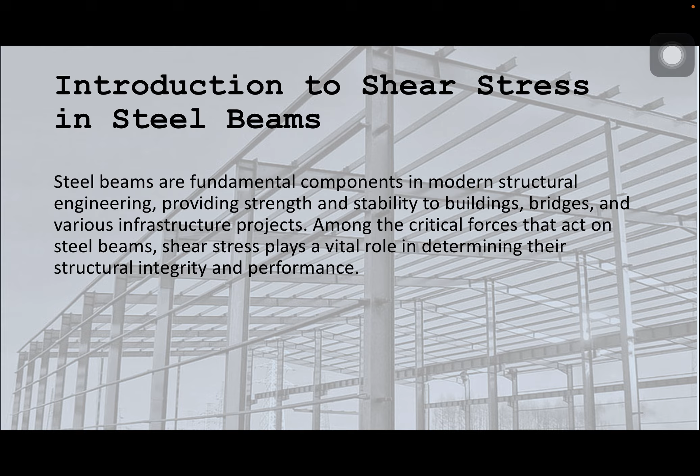Shear stress refers to the internal force per unit area that acts parallel to the cross-section of material. So in steel beams, it arises primarily from transverse loads, which are forces applied perpendicular to the longitudinal axis of the beam. These loads generate reactions and internal stresses that the beam must resist to maintain equilibrium and to prevent failure. So understanding the distribution and magnitude of shear stress is essential for ensuring the safety and efficiency of structural designs.

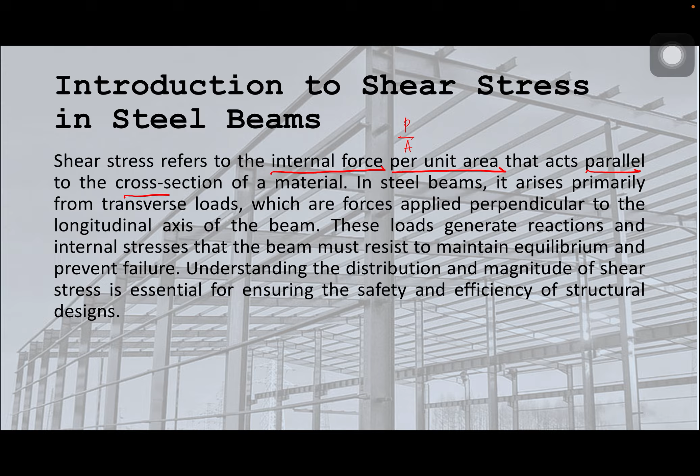So traditionally, shear stress in steel beams is analyzed using the principles of mechanics of materials, including the application of the shear formula. And this is the shear formula wherein shear stress is equal to VQ over IB, wherein fv is equal to the shear stress at a given point in the cross section, V is the shear force acting on the beam, Q is the first moment of the area above or below the point of interest about the neutral axis. And this is also called the static moment.

And how do we solve for Q? Q is solvable by using the equation Q is equal to summation of AY. And take note that that is just the first moment of area above, or below the point of interest. And then yung I natin, that is the moment of inertia of the entire cross section. When we say entire, ibig sabihin pang kabuuan. So, may pinagkaiba kasi sila pagdating kay Q because the static moment naman is meron lang tayong kinukuha.

Then the B is the width of the cross section at the point of interest or yan yung thickness or kung ano man yung kung saan tayo dadaan pagdating sa shear natin. The equation above is based on the assumption that the stress is constant across the width B and it is therefore accurate only for small values of B.

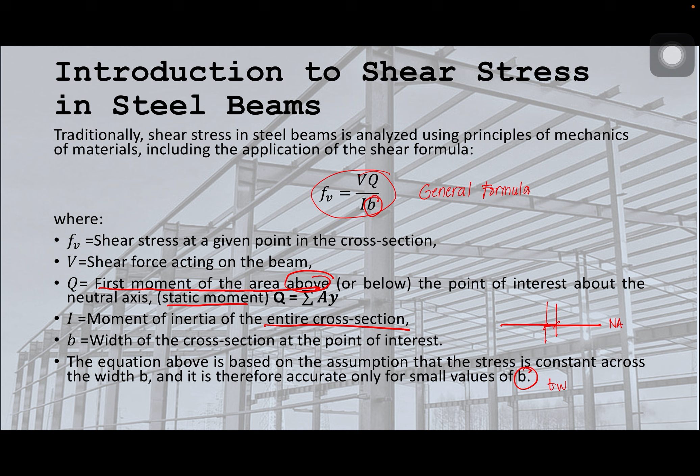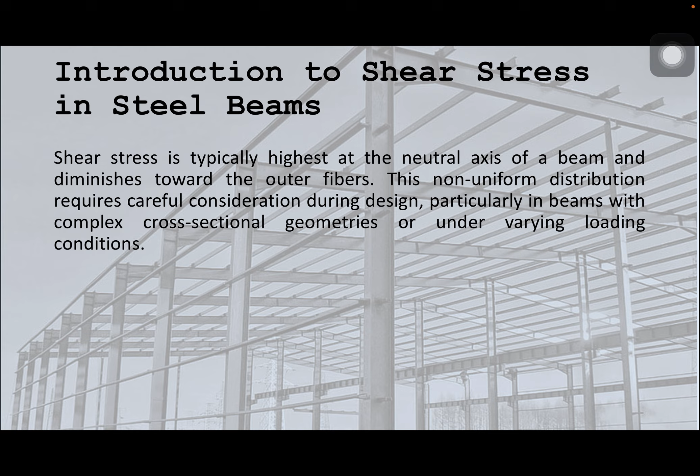So shear stress is typically highest at the neutral axis of the beam and diminishes toward the outer fibers. This non-uniform distribution requires careful consideration during design, particularly in beams with complex cross-sectional geometries or under varying loading conditions. So in practice, structural engineers must account for shear stress to prevent potential modes of failure, such as shear yielding or shear buckling. So steel beams are often reinforced with web stiffeners or designed with optimized geometries to enhance their shear resistance.

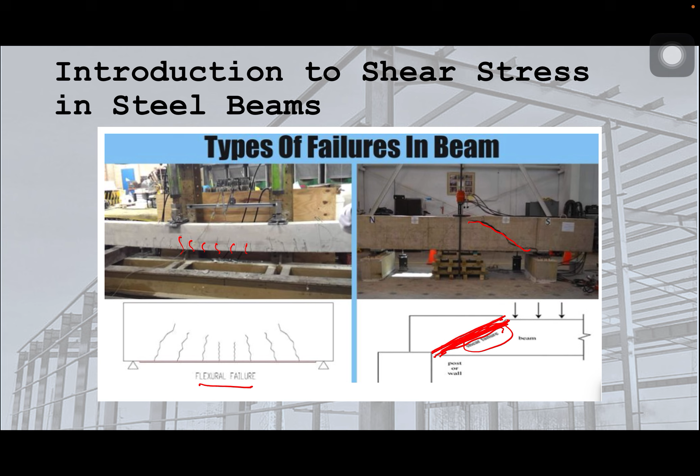So this is the distribution of the I-beam. Okay, so 'di ba sabi nga sa atin kanina that the maximum shear stress is occurring at the neutral axis of the section because when we distribute the shear strength ng ating beam natin, makikita natin that this one, ang laki niya dito. Eh, saan ba yan nanggaling? Ito po, dito sa ating web. Pero pagdating doon sa may flange natin, ito lang siya. So, stiff lang kasi siya.

So, kasi kumbaga, di ba, ang pinaka-critical talaga pagdating sa I-beam natin is the web. Pag naglagay ka kasi ng load dyan, sino ba yung unang masisira? Siyempre, ang nasisira ay yung ating web. So, kaya siya nagkakaroon ng buckle. So, that's why this is what we call the shearing formula natin. So, fv is equal to VQ over IT or this is just IB as well. So, yung T kasi dyan is just the thickness as well.

And then, to get now the average naman. Kasi kung titignan natin, di ba, yung itsura naman din niya talaga is para lang din natin siyang mako-consider as parang assumption natin na ang nangyari sa kanya is a rectangular shape. So if we're going to get the average shear stress, it is this one. We use FV is equal to V over AW, wherein yung AW natin is just the depth multiplied by the thickness of the web.

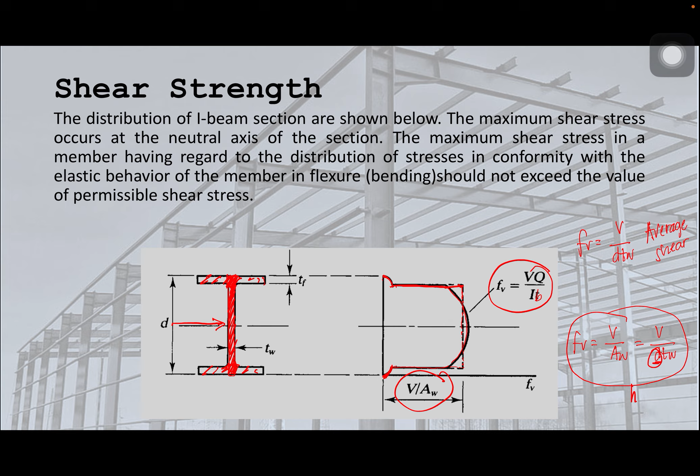So clearly, the web will completely yield before the flanges begin to yield. Because of this, yielding of the web represents one of the shear limit states, taking the shear yield stress as 60% of the tensile yield stress, we can write the equation for the stress in the web at failure as, so sabi nga natin, shear stress is equal to force over the area, wherein yung area na pinag-uusapan natin dito is area of the web, and yung force natin is the shear force. So we have V over dTW.

And sabi nga natin, taking the shear yield stress as 60% of the tensile yield stress, we're going to equate this as 0.6 of our Fy. So therefore, kuhanin natin ito, yung part na yan. So we have V over dTW is equal to 0.6 Fy. And if we're going to talk about the shear force only, lipat lang natin si dTW sa kanan, magkakaroon na tayo ng V is equal to 0.6 Fy dTW.

But on the other hand, the nominal strength corresponding to this limit state will be nominal strength in shear provided that there is no shear buckling of the web. Whether that occurs will depend on H over TW, wherein yung H natin dito is just the height lang ng web natin talaga. The width thickness ratio of the web. So if this ratio is too large, that is, if the web is too slender, the web can buckle in shear either elastically or inelastically.

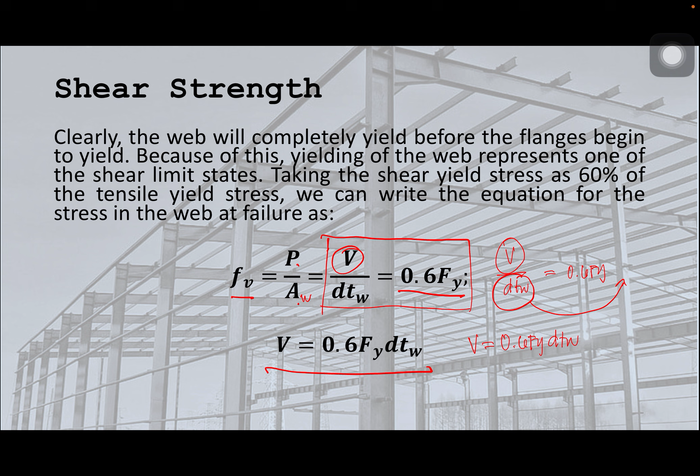This one, okay? So, kumbaga, nilagay natin that the value of the shear is 0.6 Fy dtw. And then, you're going to divide it by dtw. So, kung makikita natin, magka-cancel na siya. So, ang natira na lang sa atin dito is 0.6 Fy over 1.5. So 0.6 over 1.5, we're going to get 0.4 and then we multiply it by Fy. So therefore, if this is the case, then your Fv will be equal to 0.4 Fy.

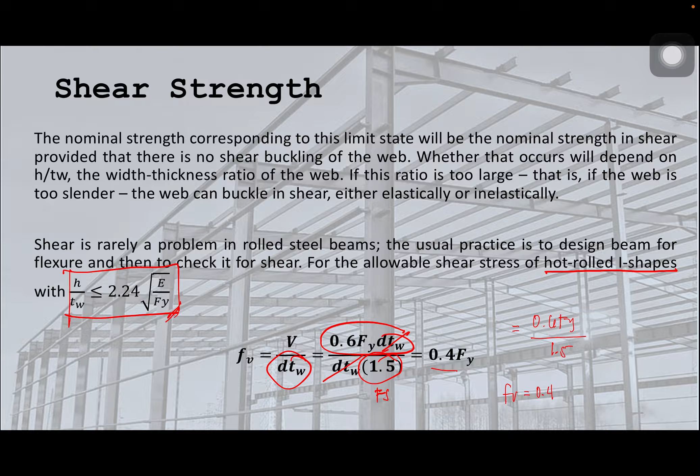So aside from the shear strength, we're going to talk also about the shear flow. Shear flow frequently occurs when dealing with built-up beams. So these are beams fabricated with several pieces joined by glue, nails, bolts, or welds. So these fasteners must be sufficiently strong to withstand the longitudinal shear. So syempre, pag nagkakaroon tayo ng built-up section, pinagpapatong-patong natin or pinagsasama-sama natin sila. So therefore, dapat masigurado pa rin natin yung flow ng shearing niya.

Okay? So, in this case, ang magiging formula natin is just q is equal to VQ over I, wherein yung q na maliit natin is the shear flow. So this is the shear flow and same process. V is the shear force and then Q is the static moment. And then yung I natin is the moment of inertia. So kung papansinin natin, ang nawala lang is yung thickness kasi 'di ba yung Fv is equal to VQ over Ib natin. So tinanggal lang natin si b, makukuha na natin yung formula ng shear flow.

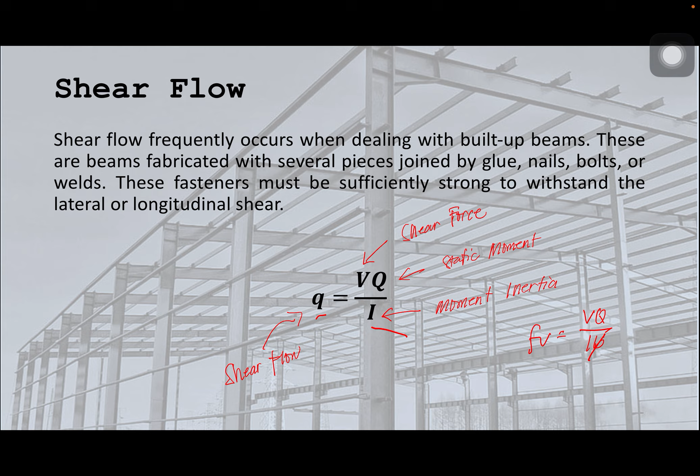So aside from that, syempre pinagko-connect nga natin. So therefore, we also have to discuss the spacing of the rivets. Hindi naman kasi siya basta-basta lang na gusto natin ganito yung spacing. So dinedesign pa din natin siya. So spacing of the rivets or bolts is denoted by s. This can be obtained using the total shearing force to be resisted by the connection. So yung R natin dito is the total shearing force. So take note that is a force to be resisted by the connection.

So kumbaga pinag-uusapan natin is the shear force na kayang i-resist ng ating bolts. And that is denoted by R. The gross moment of inertia is I, the shear force is V, and the static moment of area is Q. So meaning, parang nabaliktad, 'di ba? Kanina VQ over Ib tayo, ngayon naman RI over VQ, wherein si R natin is the shearing force to be resisted by the connection. And how do we solve for that? Same pa rin naman, using the shear stress, 'di ba?

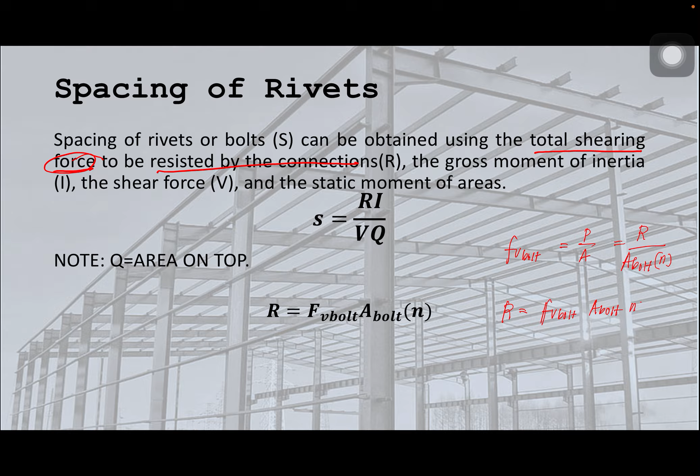Syempre, meron tayong shear stress ng bolts natin and that is just equal to P over A. Wherein yung P natin is denoted by R and yung A natin is the area ng bolt. And of course, this is a connection so we multiply it by the number of bolts. So to get the value of R, that is just the shear stress of the bolt multiplied by the area ng bolt and the number of bolts. Okay, so para mas maintindihan natin yung konsepto na ito, let us go on to our sample problems to be discussed on the following videos.